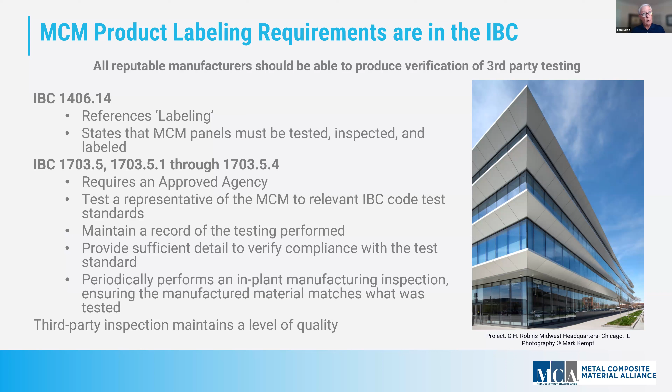So now onto the engineering evaluations and judgments or analysis. They're called a couple different things. Again, it's permitted by the IBC section 104.11. And it's a viable path on a case by case basis. In other words, all these NFPA 285 tests that have been done and the data that has been performed on them, it ties it all together.

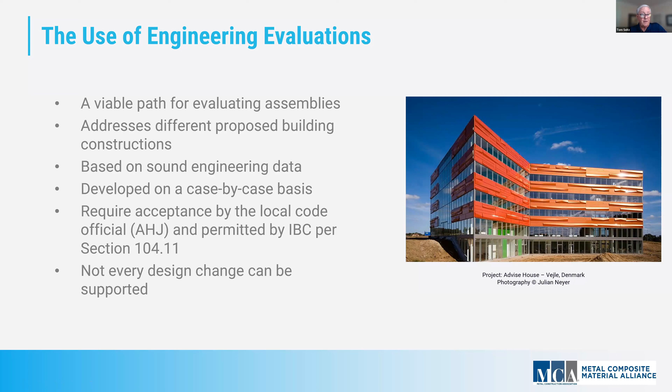And then the other item here that is probably the most important part is it requires acceptance by a local code official. The AHJ, the authority having jurisdiction, is the one who makes the final decision on whether or not this engineering evaluation, judgment, or analysis really fits what he's looking for. And not every design change can be supported. So you could be going through this whole thing, and if you're not real sure, it might not even make it.

So the components of the evaluation are, it must be completed by a qualified, experienced technical organization, consultant, or engineer. In most cases, it's a fire protection engineering firm. They're the ones that have the most experience. It must clearly describe the change being requested and how it varies from the successful NFPA 285 tested assembly. And does the evaluation provide the technical justification for the change?

So how the substitution change is determined to be okay is obviously additional testing, technical rationale, and testing experience. All of those are part of that same process. The key question for an engineering analysis, evaluation or judgment is, does this substitution provide a wall assembly exhibiting the same or similar fire performance as the successful 285? That is the key point to this whole process.

Now, in this process, there's an awful lot of components. And our suggestion, and the suggestion that comes from the fire protection engineers, is start this process as early as possible. If you know your system might be lacking in a certain function, don't waste time, get on there early, because delays can be costly, weeks, months in delays. And that's not something that you really want to get involved with when you're working on a project for an owner.

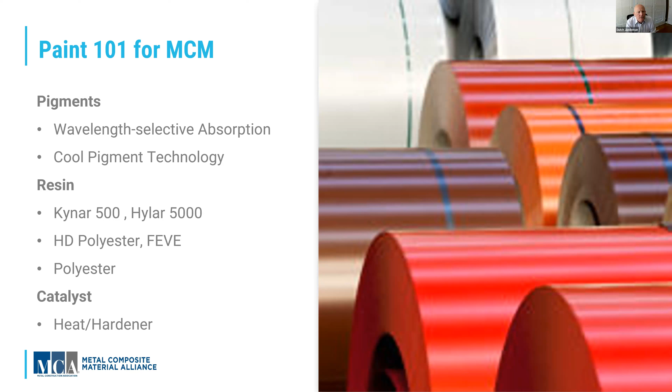The last item is the catalyst, which for coil-coated materials like we supply that are factory applied in a huge coil coating line, is the component that actually cures the paint with heat to provide a hard, long-lasting, durable paint finish for the applications we see. Tom, if you'll go to the next slide.

So how do we rate the different types of paint finishes that are utilized in the architectural market? The American Architectural Manufacturers Association, or AAMA, and this has been in place for 30 plus years, has developed what they describe as a voluntary specification for different types of paint performance.

These specifications are a collection of different ASTM test protocols that measure performance of the paint systems, whether it's pencil hardness, film thickness, resistance to corrosion and such. And there's different levels of that within the system. This includes film integrity, exterior weatherability, and sustained appearance over the life of the paint system. So let's talk a little bit more about these AAMA specifications. Tom, if you'll slide to the next one.

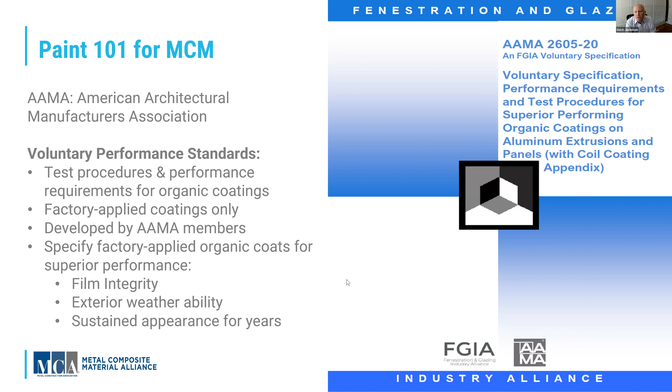Now, I do want to comment that differentiating between AAMA 2605 and 2604 for those HD polyesters and FEVE coatings is really based on the pigmentation used in those formulations. Your bright, vibrant colors that you see in branding applications, the blues, reds, yellows, greens, oranges, the pigmentation utilized to get those colors is not as durable to UV light as your muted earth tones that you see more on the architectural side. So there are some limitations with bright, vibrant colors meeting the AAMA 2605 specification.

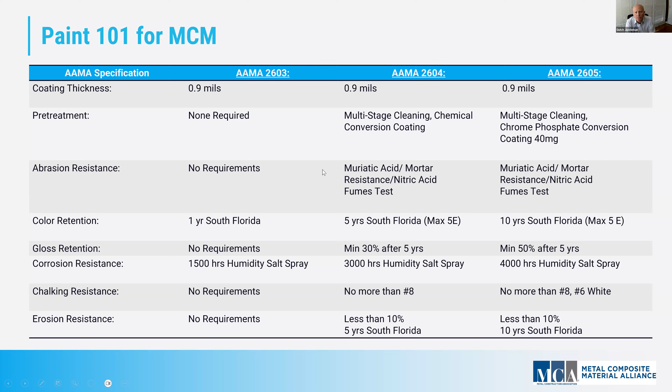So as a manufacturer, we provide the paint warranty, and the typical paint warranty supplied for these types of finishes covers 3 primary items. You've got fade, which is typically 5 delta E exposure. Chalk is a 6 or 8 rating, depending on whether it's a white or a heavily colored pigmented paint. Chalking is a degradation of the resin system. So the higher performing paint system you have, that resin will degrade at a longer rate and provide the better performance. Gloss is also a component of warranty on occasion, not on every warranty.

The last item would be reference to film integrity. So that's really about how well the paint finish is adhered to the substrate material. Now, what I will say is, from a warranty perspective, it's kind of like the AAMA testing. Those criteria, 5 delta E for fade, 6 or 8 chalk, and film integrity, it's really based on the paint system itself. And so it's the same for a polyester, the same for a FEVE, the same for a PVDF, but your timelines are different.

Polyesters typically are going to be 5 to 10 years. Your high durable polyesters and FEVEs can be out 10 to 20 years. And then when you get into the super performing PVDF, you're going to see 20 to 30 year warranties on those types of products.

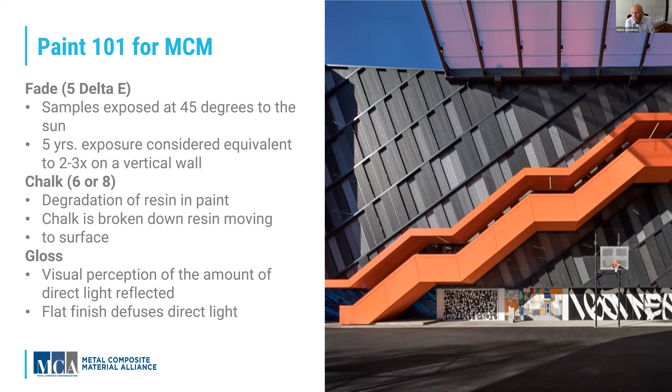So just in summary, from the perspective of what's the highest performing paint system for architectural applications, that's going to be your PVDFs, your Kynar, Hylar, PVDF resin base. It's a 70% PVDF resin by weight. Your gloss ranges are somewhat limited in these products, but ultimately you're looking for 30-year warranties, and in some cases you can have 25-year warranties with 3-coat systems in coastal environments. So the warranty itself is passed through, so it's actually warranted by the paint manufacturer. We pass it through to our customers, and that moves on to the building owner when the job is completed.

I will say that as a manufacturer of the product, when I'm looking at specifications and looking at paint systems, I'm looking for 3 things in those specifications. The first thing I want to look for, is there any reference to the system type, that being the resin system? Is it specified as a PVDF, a fluoropolymer, FEVE? The second would be to look at what type of warranty requirements are in the specifications. Is it 5, 10, 20, up to 30-year warranty requirements? And lastly, if there's a reference to that AAMA specification. As a manufacturer, that's going to help identify what the expectations of performance of the paint system are going to be on the ACM. And that gives us a clear indication of what type of product we would be providing to our customer base.

So let's talk about what is an MCM certified fabricator. As a certified fabricator, there's a couple different things. If I'm buying MCM, I want a certified fabricator on my project, because as a certified fabricator, you must show some things to the MCA to be part of this program. And first and foremost, to be part of this program, you got to show experience. As a certified fabricator with that experience, you're going to have some projects under your belt. You're going to prove that you have some projects under your belt.

You have to be able to prove that you can produce at least 150,000 square feet per year of the MCM product. Secondly, you're going to show services. You're going to have to show that you have services such as in-house drafting, engineering, project management, estimating, design services. You're going to have the full service or the full customer experience to be part of this program.

You're also going to have to show that you have MCM systems and the requirements to meet the specification per the MCA, and that you've tested these systems to those standards. And you got to prove that you have those test reports and those certified test reports and meet those standards. And lastly, you got to have the financial backing.

You have to show that you're financially stable. For the CFMA, you got to be able to be deemed healthy. You've also got to be able to show a surety letter with basically either an A+ or better rating. And you're going to have to show that you have the ability to bond a project. That's what it means to me to be part of that certified fabricator program.

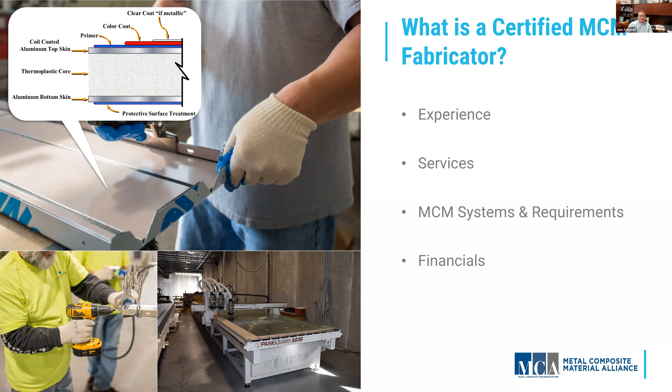So MCM systems. An MCM system is designed to withstand specific loading while maintaining allowable deflection and thermal movement and performance. There's lots of systems out there. We could do a whole other presentation about systems all by itself. But let's just talk about two basic systems that you kind of see within the industry. First one we're going to talk about is wet joints.

Wet joint systems or barrier systems are sealed with silicone. They're routed and fabricated in formed pans with some type of extrusion or interlocking extrusion or clip system, and basically the whole system gets caulked in. And it is truly the barrier for the building. It's part of the waterproofing of the building. And those systems are specified against the AAMA 501 standards. Also listed are basically ASTM E283, ASTM E331, and ASTM E330.

Now let's talk about dry joint systems. Dry joints or rain screen systems. There's a couple different variations of those. There are basically two main variations of rain screen panel systems out there. One is the DBVR, which is drained and back ventilated rain screen, and it's basically specified around the AAMA 509 standards. And you have PER, or pressure equalized rain screen, and it's governed around the 508 standards.

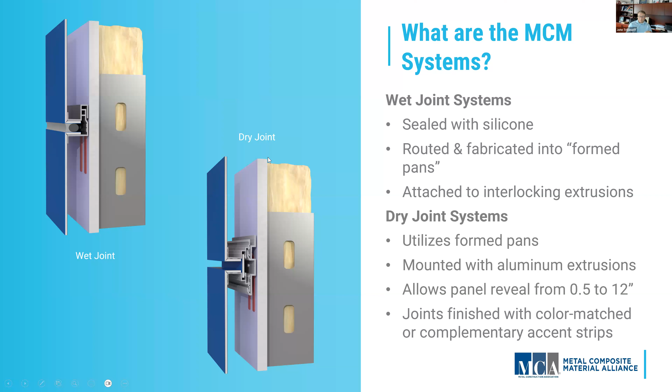With that, we take it to the next slide. Thomas talked about some specialty uses for MCM. The special uses for MCM: MCM can be used in a multitude of ways to meet design needs for your project. A couple of examples of this, you've got some custom signage here, you've got some column covers, you've got some acoustical panels, sunshades, some monumental features, and some entry features.

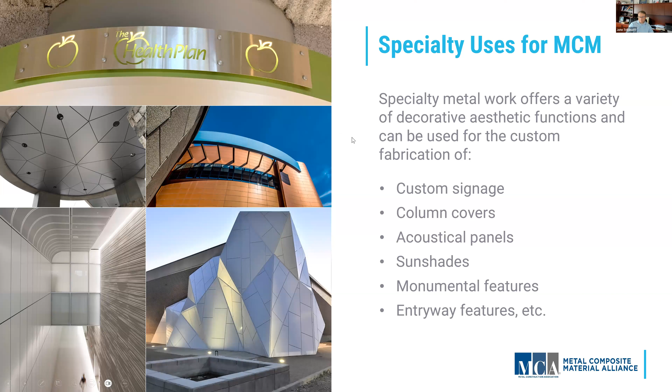It's a very versatile product. It can be designed from the exterior to the interior of your projects. So some of the stuff you see here, down the bottom right, you see the monumental iceberg on a school we did. You also see a project that has some acoustical panels. You'll see a project with a vestibule. So there's a lot of different variations here where you can use the MCM product. With that, let's take it back to Dutch to talk about a couple other projects.

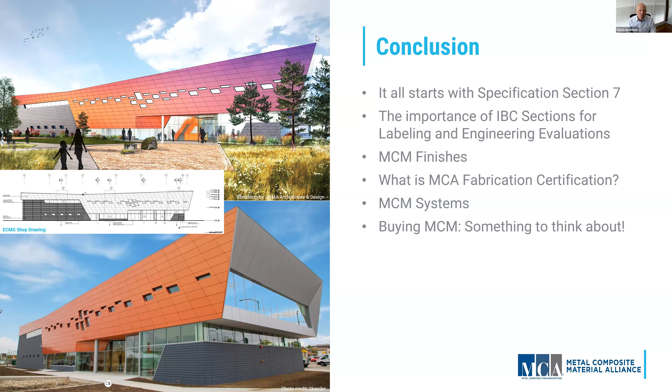To utilize these types of coatings on steel, yes, they're utilized by other manufacturers of single skin profile products or insulated metal panels. They utilize a lot of coated steel. For the composite business, for us, utilizing steel becomes a huge weight factor. So where you have steel composite material out there, it's going to create a lot more weight. The fabrication methods are much more challenging.

Aluminum cuts so simply with high-speed routers, whereas steel would be a low-speed cutting. So it would just be a more costly application, not just from fabrication, but also from the installation side of things as well. Hopefully that answered the question.